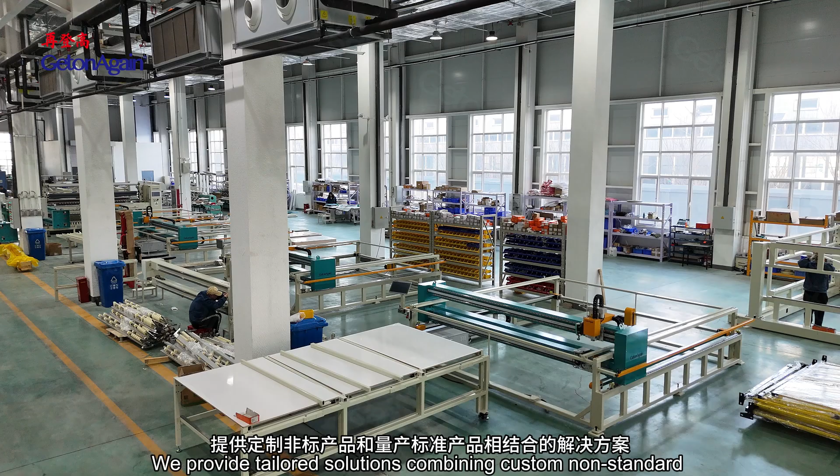We provide tailored solutions combining custom non-standard products with mass-produced standard products, including mechatronic machines, automated production lines, and intelligent factory solutions. Pattern room equipment includes the magnetic inkjet plotter, 2 cartridge with maximum printing speed at 110 square meters per hour.

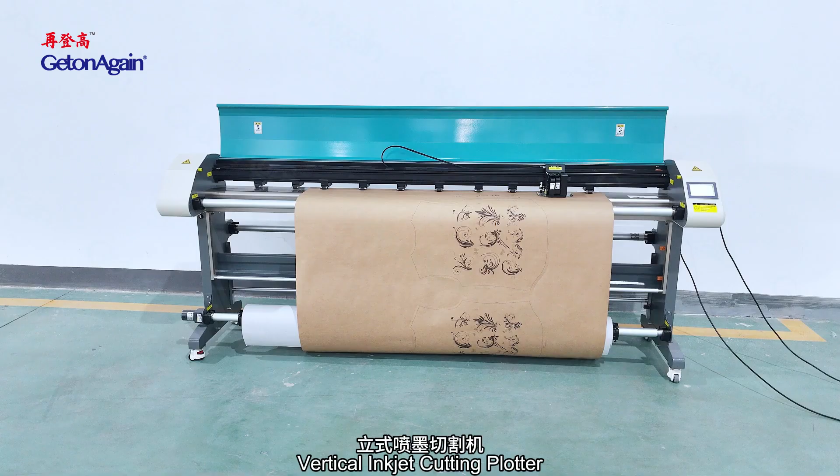4 cartridge with maximum printing speed at 200 square meters per hour. Vertical inkjet cutting plotter: 1 machine with multiple functions, pattern drawing with cutting, or standalone drawing. High-quality rotary cutting knife can cut a minimum of 80 grams per square meter paper for sample design, saving costs.

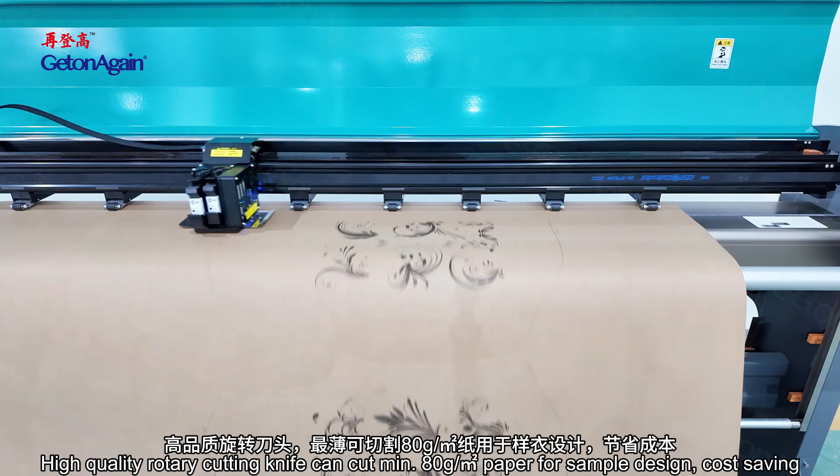Flatbed inkjet cutting plotter, full speed map printing and cutting function, suitable for personalization, configured with long knife or short knife, and optional fixed knife sleeve or elastic knife sleeve, suitable for cutting various materials.

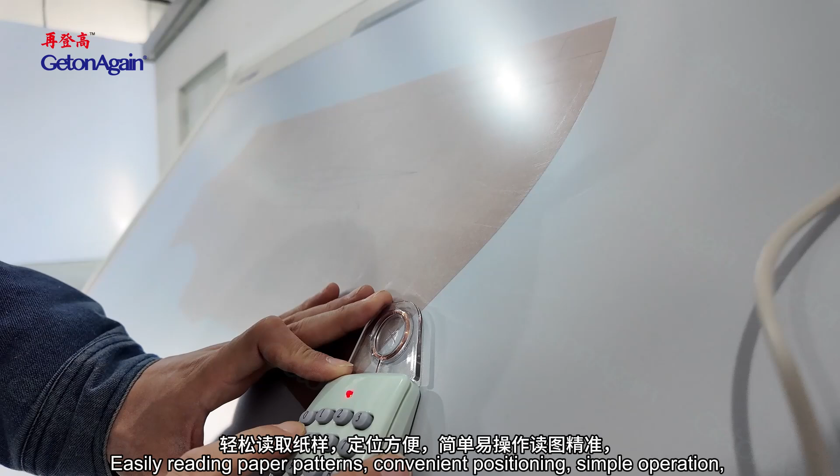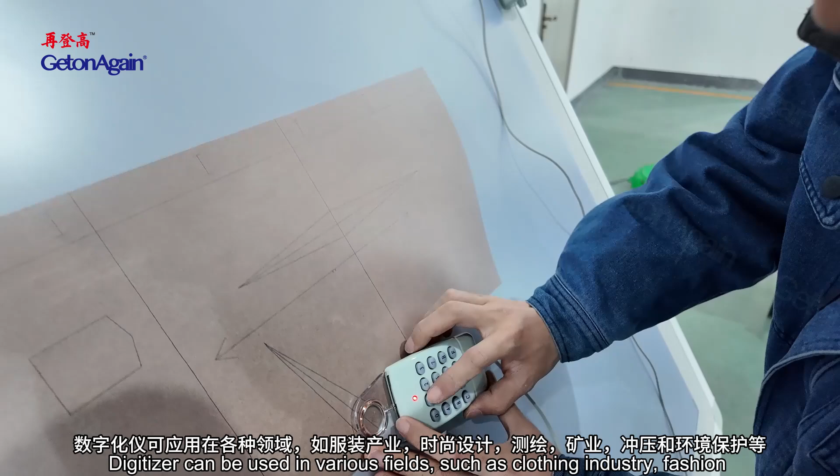Digitizer: easily reading paper patterns, convenient positioning, simple operation, accurately reading patterns, enabling speed up of the design. It is a powerful tool for traditional manual drawing digitization. Digitizer can be used in various fields, such as clothing industry, fashion design, surveying and mapping, mining, stamping and environmental protection, etc.

Flatbed scanning digitizer: 1 button to start after placing scanning pieces. Can vacuum absorption auto scan and auto transmit. According to different models, supports ultra long width scanning.

Scanning speed up to 7,200 mm per minute. Scanning resolution 150 to 300 dpi. High definition panoramic 1:1 image to ensure effective identification of various contours, notches, and inner holes.

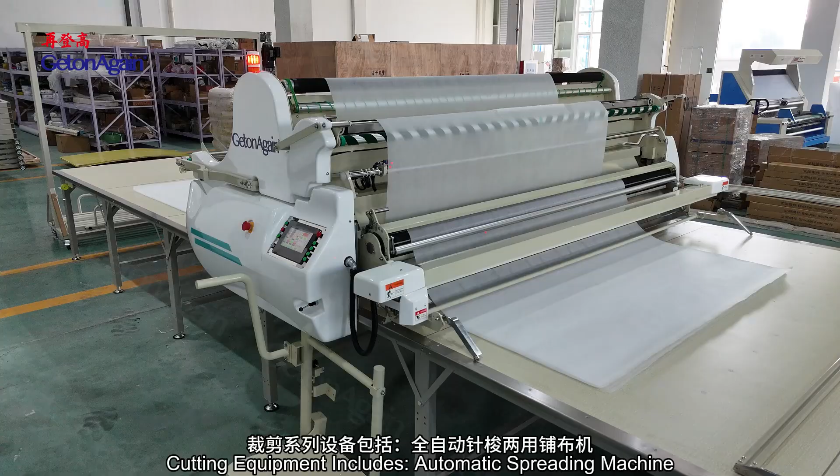Cutting equipment includes automatic spreading machine. Easily set the spreading method, length, speed, quantity and sections, with intuitive as well as simple operation. Dual use for both knit and woven fabrics, suitable for t-shirts, children's clothing, loungewear, and toy textiles.

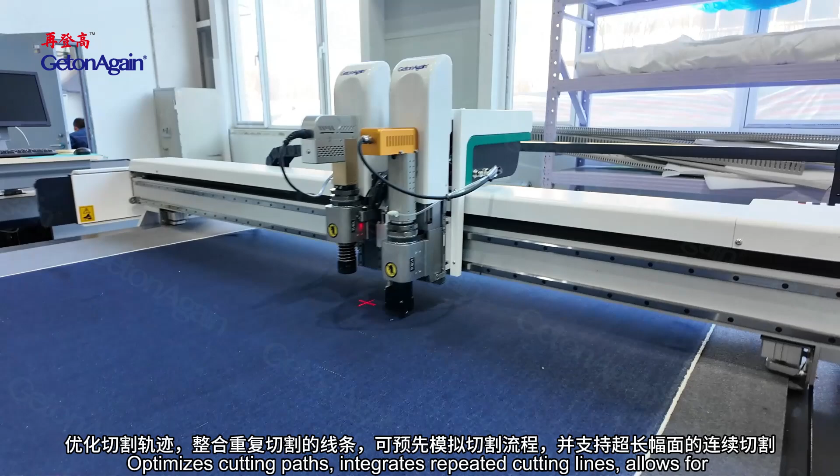Automatic single layer cutting machine. No need to create specialized cutting molds. Cutting can be performed precisely by directly importing CAD design drawings into the equipment. Optimizes cutting paths, integrates repeated cutting lines, allows for pre-simulation of the cutting process, and supports continuous cutting for extra long materials.

Stripe and plaid matching cutting machine, equipped with a few HD industrial cameras, performs intelligent combination according to the capture size, ensuring high accuracy fabric image capturing.

Stripe and plaid matching auto cutter, equipped with double knives and pen draw punching working mode, specially designed for various stripes and plaids fabric cutting in single ply.

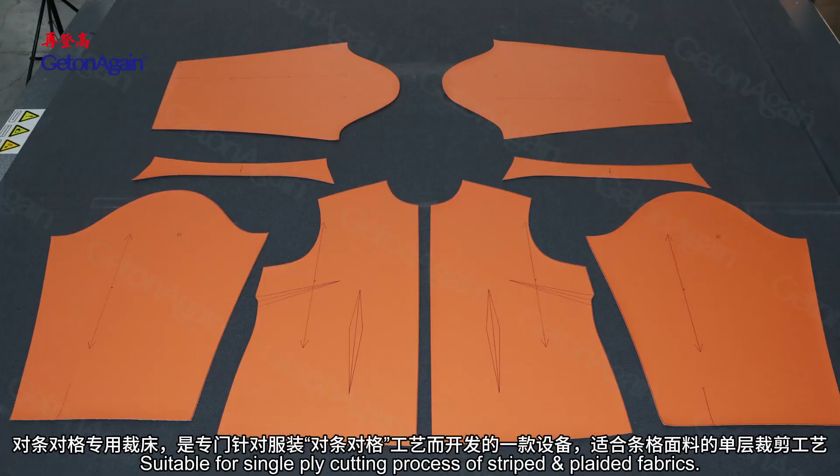High-end clothing customization: the effect of the alignment match stripe and plaid process has become an important measurement of the quality of this type of clothing. The stripe and plaid auto cutter is equipment specially developed for this process to meet matching stripe and plaid clothing needs, suitable for single ply cutting. Process of striped plaided fabrics.

Automatic multi-layer cutting machine. Through the combination of micron-level intelligent sensing components and an intelligent control system, dynamic compensation and correction of cutter deformation during cutting operations are achieved, significantly reducing errors between the top and bottom layers of fabric during cutting, enabling truly high-precision intelligent cutting.

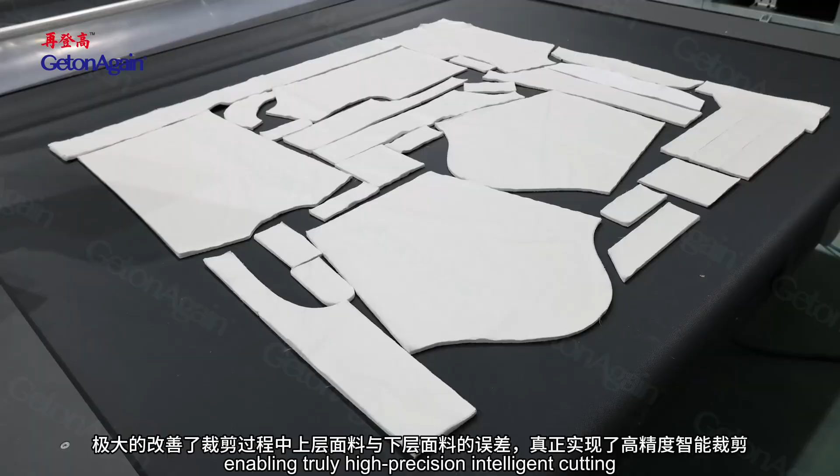Embroidery equipment includes the Cloud Smart Teaching Embroidery Machine, suitable for integrated theoretical and practical teaching of computer embroidery in fields such as fashion and apparel design, clothing design and engineering.

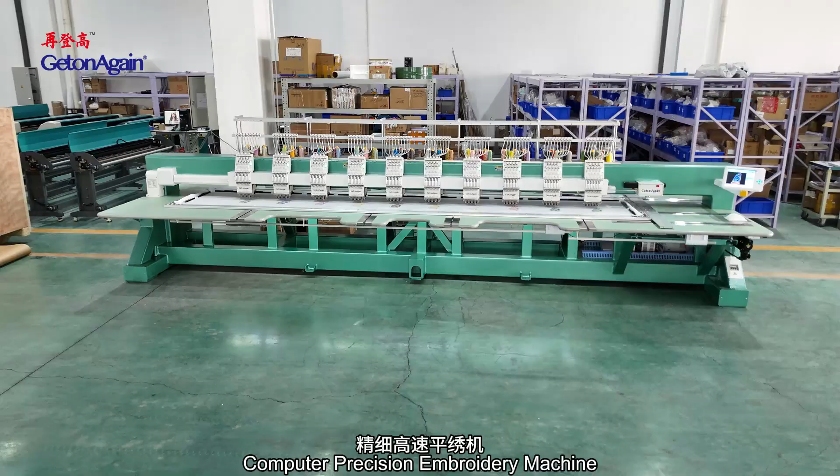Computer Precision Embroidery Machine features a high-speed sewing head with extremely low failure rates, long service life, low noise, and stable, reliable quality, suitable for embroidering small letters, premium garments, high-end home textiles, footwear, hats, automotive products with embroidery, etc.

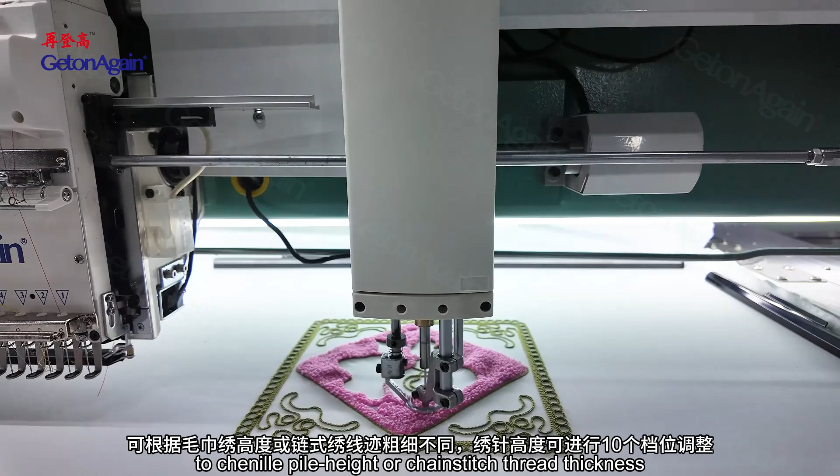Mixed chenille chain stitch embroidery machine. Mixed embroidery feature, according to color sequence settings, switchable between chenille embroidery and flat embroidery, simplified operation. Chenille needle height can be adjusted for 10 levels according to chenille pile height or chain stitch thread thickness.

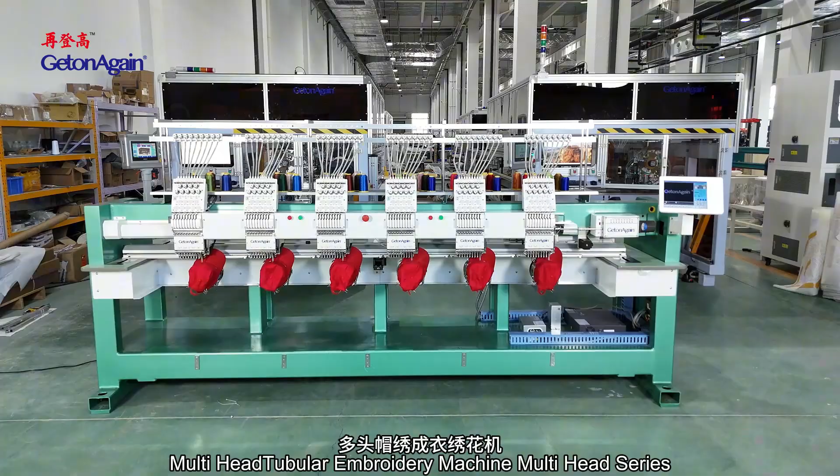Multifunctional embroidery on garment, shoes, caps, home textile, toys, bags and luggage, art craft, etc. Multi-head tubular embroidery machine multi-head series, suitable for embroidering on flat, caps, garments, shoes, belts, bags, etc.

Auto thread feeders, auto color change, auto thread break detection, 270 degree wide angle cap system, red light locating, LED lighting, precise head and drive system to ensure exquisite embroidery work.

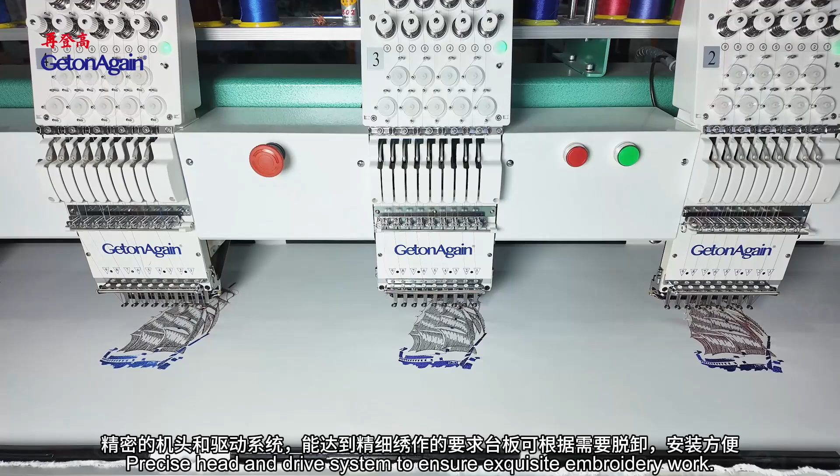Drop tables, easy to lift up and down. Multiple heads greatly improve work efficiency, suitable for embroidery shops and factories of a certain scale.

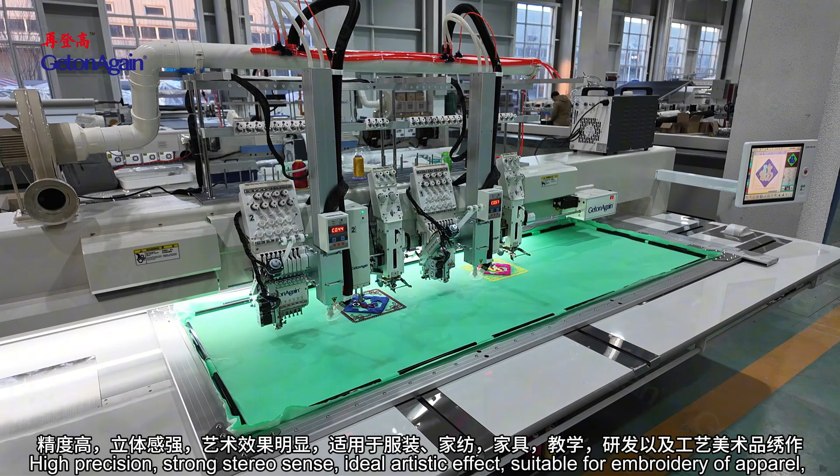Computerized 5-in-1 embroidery machine, integrated 5 functions in one machine: flat embroidery, coiling, tape cording embroidery, chenille, chain stitch embroidery, double sequin device, laser cutting function, high precision, strong stereo sense, ideal artistic effect, suitable for embroidery of apparel, home textile, furniture, teaching, design and arts and crafts, etc.

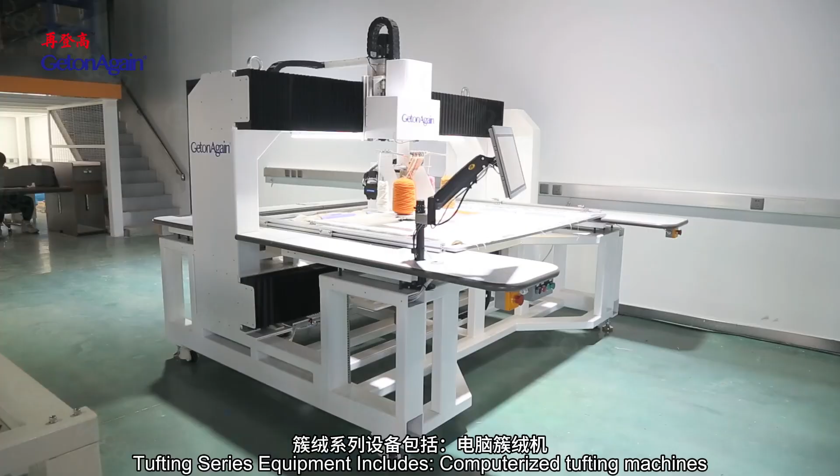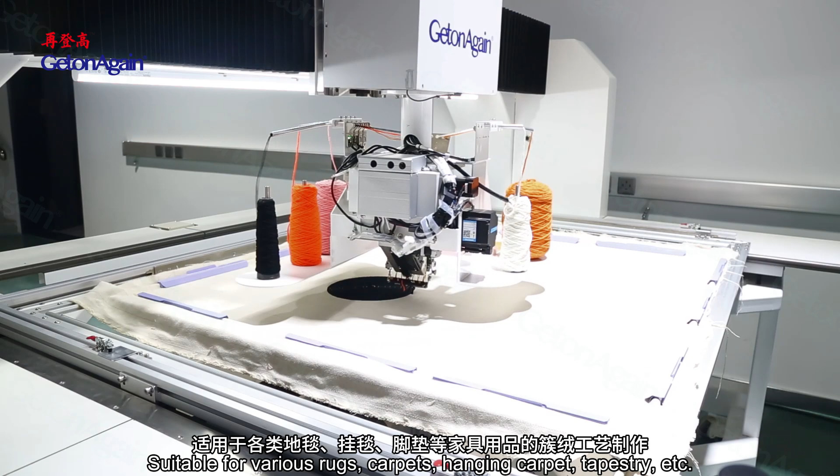Tufting series equipment includes computerized tufting machines, rotary tufting head in any angle, avoid positive-negative stitching difference, higher efficiency, better tufting result, suitable for various rugs, carpets, hanging carpet, tapestry, etc. Those flooring decorative and home furnishing products tufting.

Laser equipment includes small format camera positioning laser engraver cutting machine, supports array recognition processing, with options for full sheet recognition, followed by cutting or simultaneous recognition and cutting. Features multi-template mixed cutting, allowing the recognition and positioning of different patterns to be completed in a single operation.

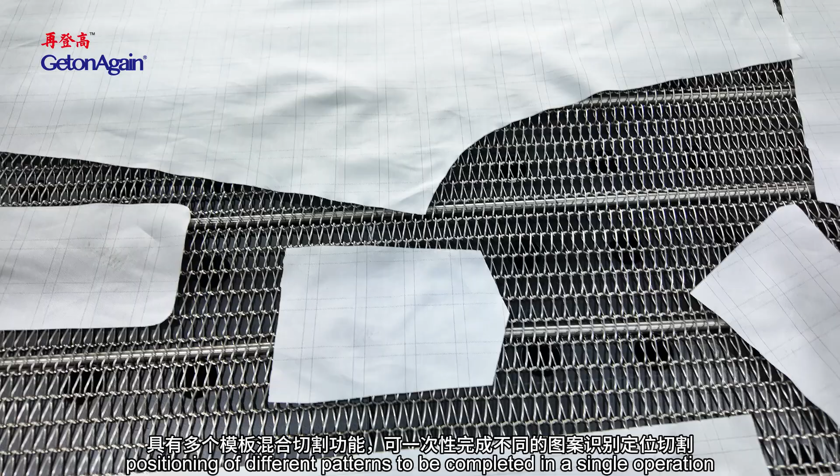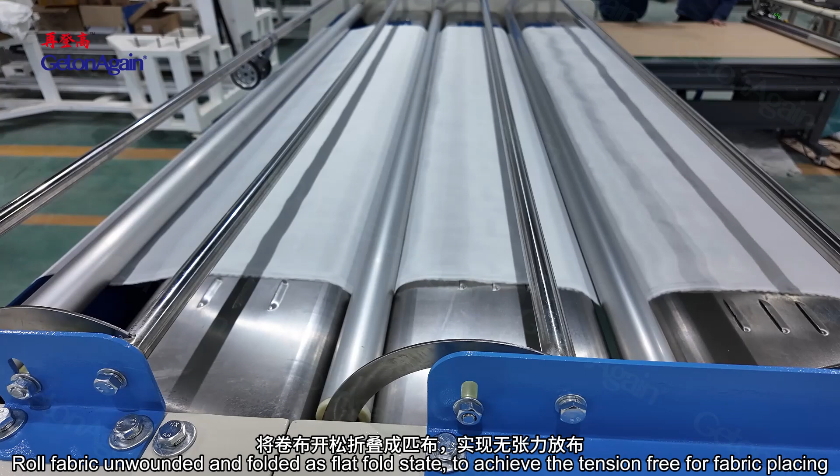Pre-sewing auxiliary equipment includes automatic edge alignment, relaxing machine, air blowing, roll fabric unwounded and folded as flat fold state to achieve the tension-free for fabric placing. Wave-type air blowing device, in loosening fabric process, fabric is relaxed by the blowing device.

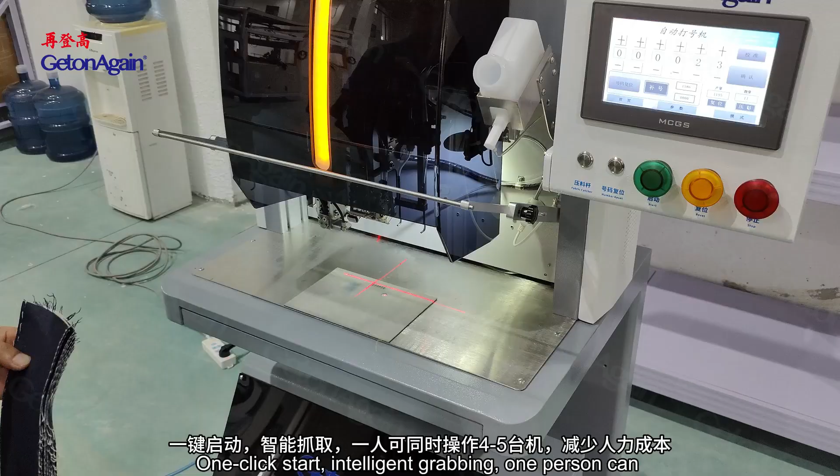Automatic marking machine, one-click start, intelligent grabbing, one person can operate 4 to 5 at the same time, reducing labor costs. Automatic number adjustment, automatic counting, wrinkleless after flipping, continuous numbering, accurate and clear position. The cutting piece for jeans, shirts, workwear and down, etc.

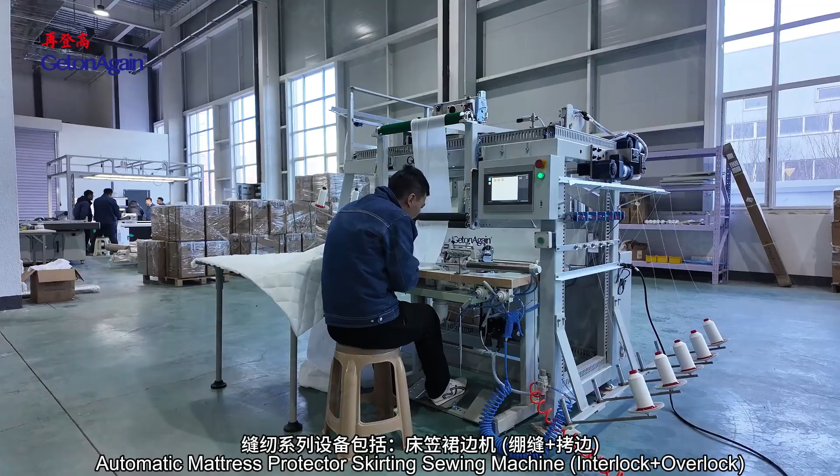Fully automatic winding machines. Sewing equipment includes automatic mattress protector skirting sewing machine, interlock and overlock, suitable for processing fitted sheets, all in one to finish binding stitching of elastic rope cord and bed skirt, and the overlocking of bed skirt to mattress protector topper layer.

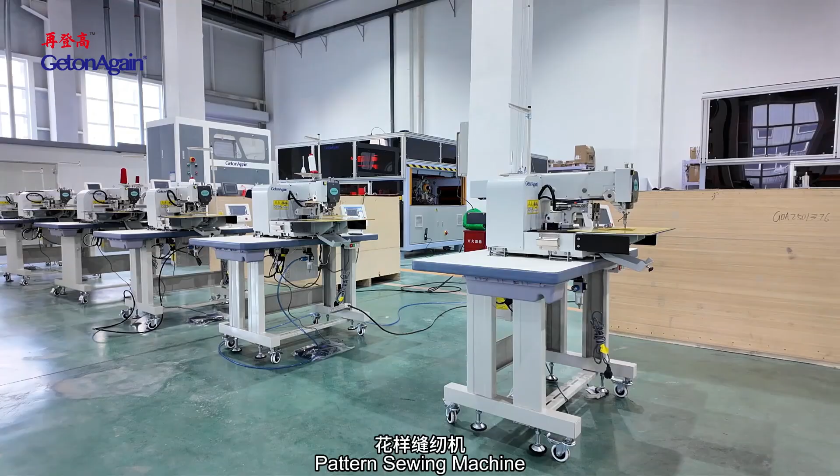Pattern sewing machine. This machine can easily sew 1,200 thick thread with a thickness of 12 mm, 2 times large rotary hook, automatic thread trimming, and the maximum sewing speed can reach 2,500 RPM.

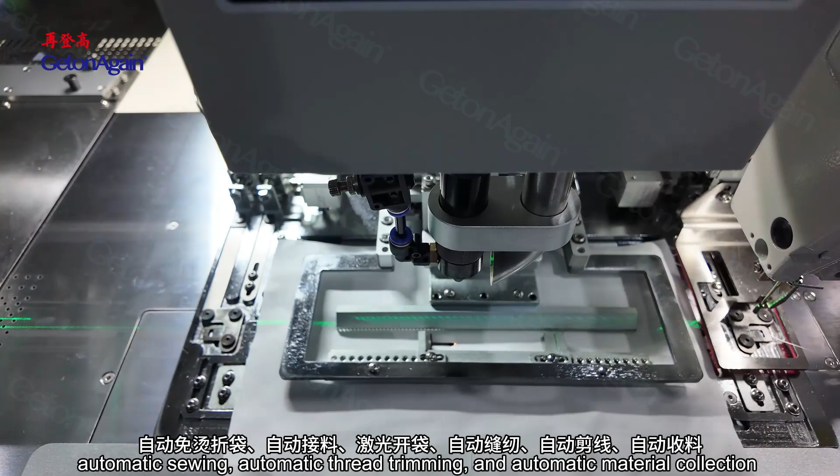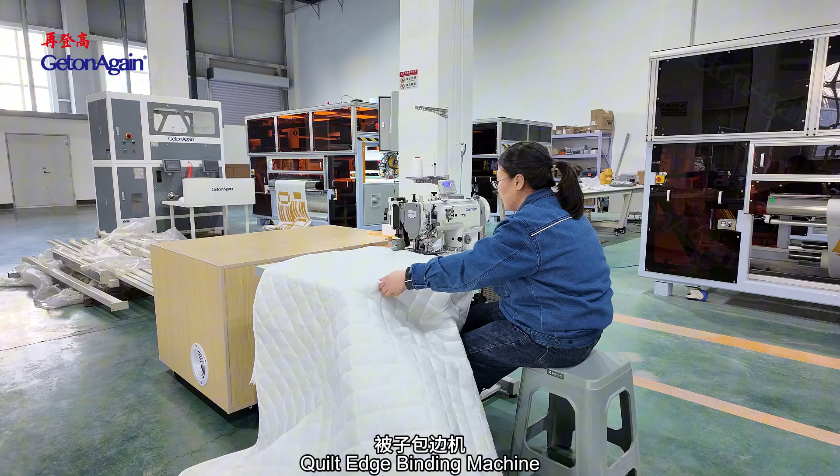Automatic laser pocket opening machine, automatic ironing-free pocket folding, automatic material feeding, laser pocket opening, automatic sewing, automatic thread trimming, and automatic material collection. Front and back pockets for men's and women's clothing, suits, inner and outer pockets of jackets, dress pants, hoodies, sun protection clothing, school uniforms, sportswear, cotton padded jackets, down jackets, workwear, jackets, uniforms, trench coats, cashmere coats, and plackets for polo shirts.

Quilt edge binding machine, features of single needle compound feed, achieving cutting, binding, and sewing in one seamless operation. Enlarged right side waste discharge port with pneumatic waste discharge assistance ensures smoother disposal of waste generated during edge cutting. Special synchronized feeding structure, including alternating presser foot, needle, feed dog, and binding attachment, ensures no wrinkles or misalignment during straight line or corner sewing for a flawless binding effect.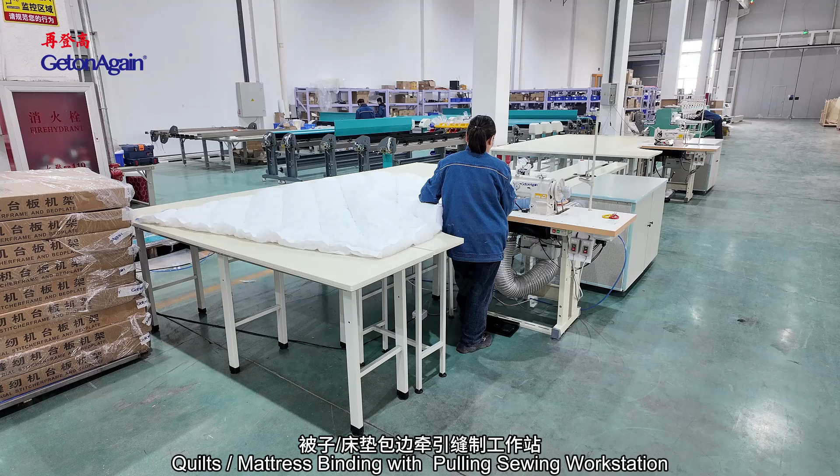Designed for edge binding processes of quilts such as cotton quilts, summer quilts, spring and autumn quilts, and other bedding items. Quilts, mattress binding with pulling sewing workstation. Equipment factory standard provides air floating table and automatic pulling device, making sewing worker operation easier and smoother. Equipped with PLC control pulling device and synchronized with sewing machine electronic control. These two machines are working in the same speed and synchronize the direction.

Optional automatic storage and vacuuming device to improve efficiency, reduce dust emissions, and provide the sewing operator a clean and tidy working environment. Binding result is rich and strong solid feel. Corners are smooth and nice, evenly stitched lengths, no hairy edge, no edge folding, neither corner raising effect, those negative symptoms, etc.

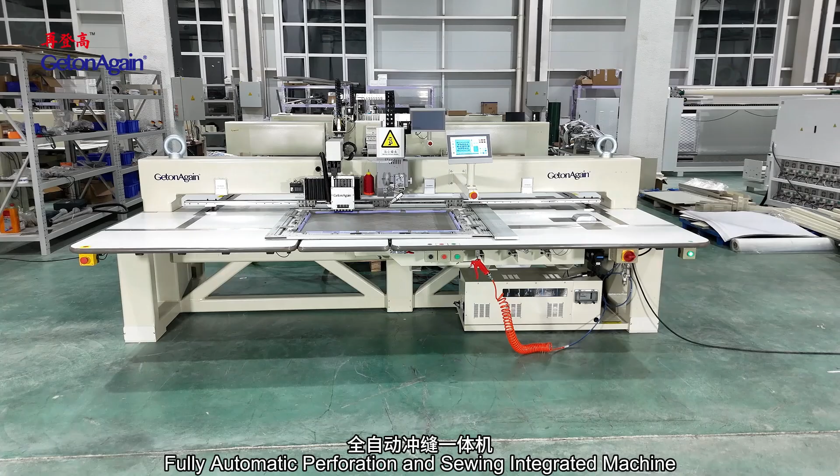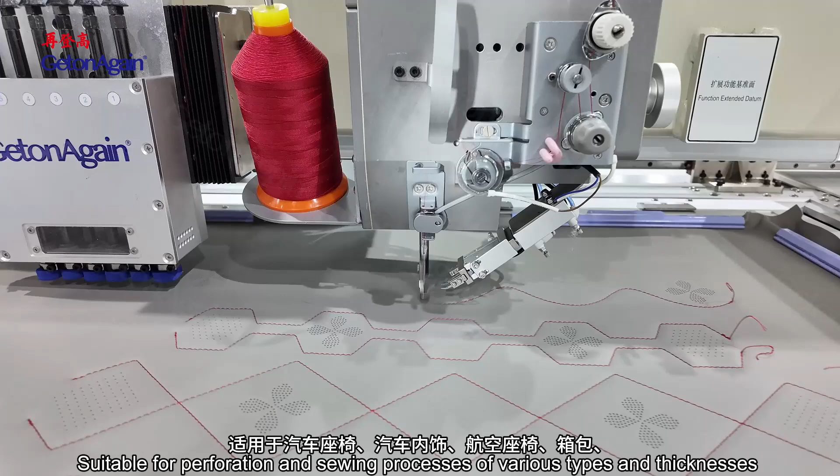Fully automatic perforation and sewing integrated machine. Punching machine head is specifically designed and developed for leather materials, equipped with various round punching tools specifications. Sewing head up moving stroke in 50 mm, providing sufficient space for material loading and easy operation. Suitable for perforation and sewing processes of various types and thicknesses of genuine leather and microfiber leather used in car seats, automotive interiors, aircraft seats, luggage, furniture, and more.

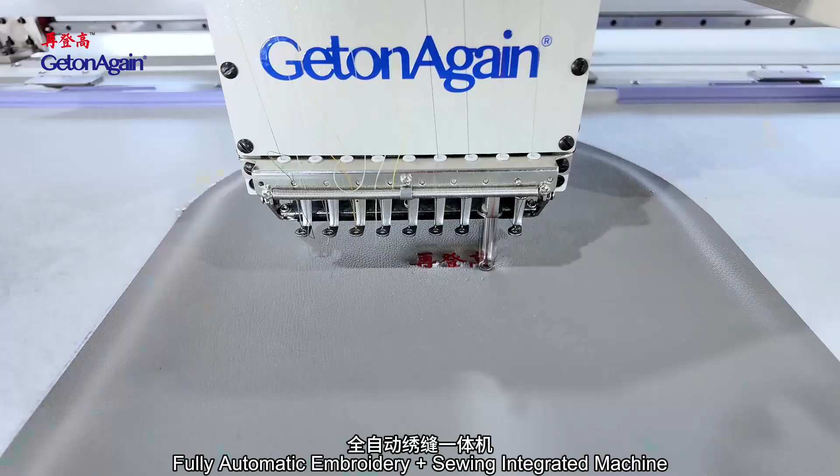Fully automatic embroidery and sewing integrated machine. 9-color embroidery machine head to meet the embroidery needs of different industries. The embroidery thread clamping mechanism incorporates a novel upper thread clamping assembly, effectively reducing thread breakage and slippage occurrences during operation. Specially designed sewing machine head for leather materials, producing beautiful stitching.

Presser foot height is motor controlled and highly adjustable. Sewing machine head has up-down moving stroke of 50 mm, providing ample space for material loading and ease of operation. Suitable for various types and thicknesses of genuine leather and microfiber leather for automotive seats, car interiors, aviation seats, luggage, furniture, etc., combining embroidery and sewing processes.

Multi-hole bar tacking machine. Press arm and sewing frame work synchronously. Ensure high precision bar tacking. Suitable for chair head, cushion and pillow, all those with fillings, and bar tacking requirement for reinforcing sewing work.

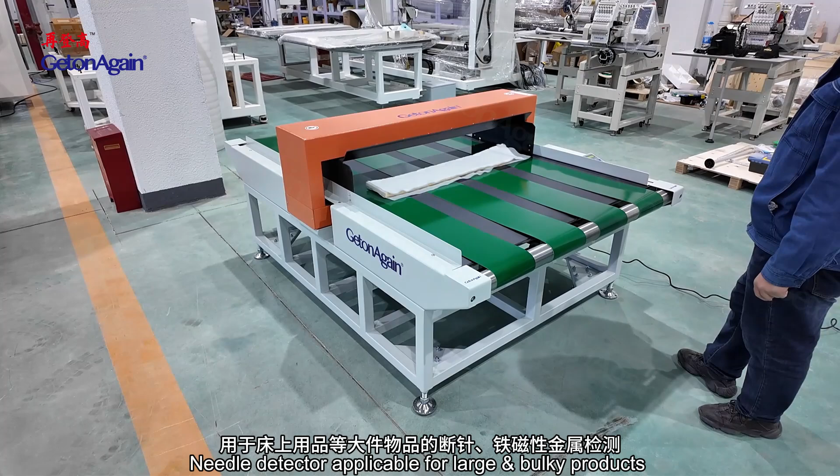Industrial sewing machines include various overlock and lock stitch machines. Post-finishing equipment includes needle detector. Needle detector applicable for large bulky products with ferromagnetic metal detection, for example bedding, etc. Working width can be adjusted between 1,200 to 4,000 mm according to customer setting.

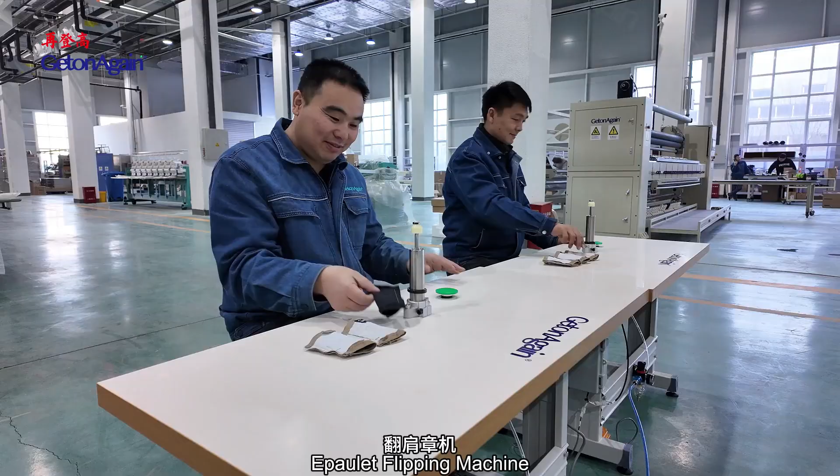Epaulet flipping machine replaces manual operation with high efficiency, safety and reliability, suitable for the flipping and turning process of epaulets or strap of various sizes and other products.

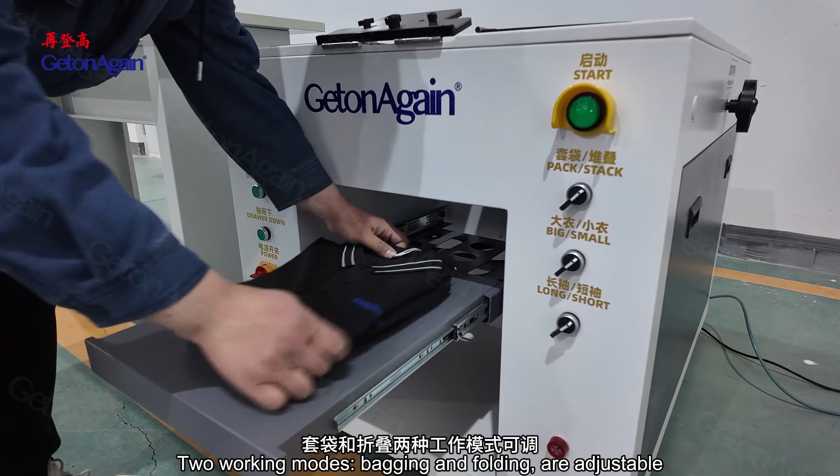Automatic folding and packaging machine: economical, small floor space, simple operation, standard folding effects, automatic transferring to next station in stacking mode. Two working modes, bagging and folding, are adjustable. Both folding width and length are adjustable within a certain range. T-shirt, polo shirt, hoodie, thermal wear, pants and lightweight jacket, etc.

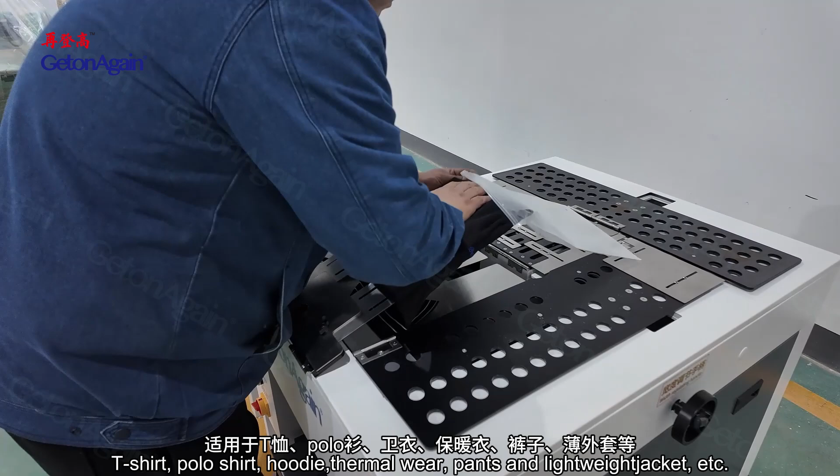Single, dual heads cap pressing machine for baseball caps. Steam time, cap clamping time, steam output, and air consumption can all be automatically adjusted. Built-in steam generator eliminates the need for an external boiler with automatic water supply, suitable for bulk order production needs. Using robotic arm, can automatically grip the cap. Simply place the cap on the mold to complete the pressing process.

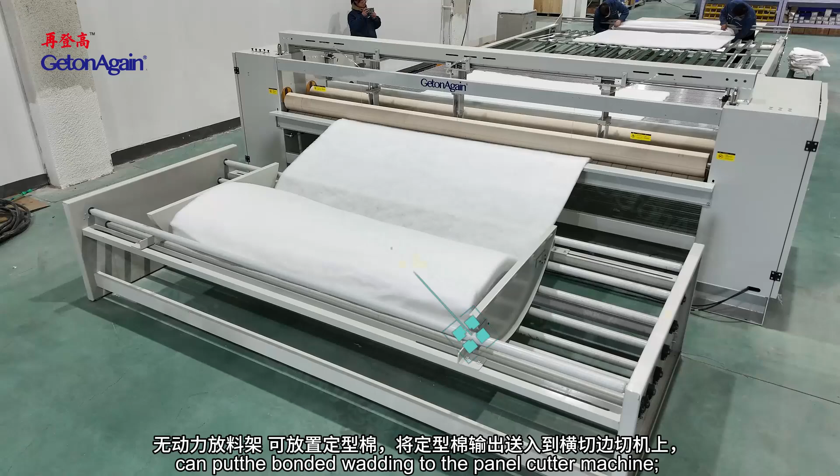Roll fiber panel cutting case filling line: edge trimming, lengths counting, cutting for polyfiber, thermal bonded wadding, chemical bonded wadding. Machine feature: unpowered material loader, can put the bonded wadding to the panel cutter machine. Equipped bearings on each roller, labor saving and energy saving. Electric flyover automatic cross cutting.

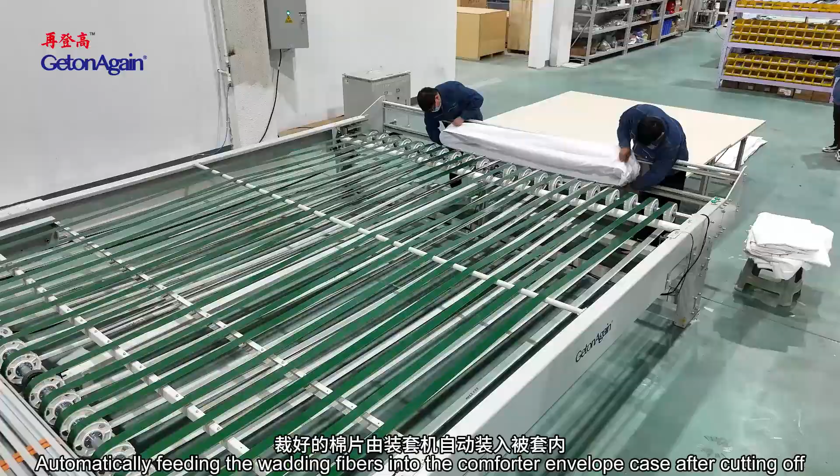Two sets of longitudinal cutting blades can be increased or decreased according to product requirement. Automatically feeding the wadding fibers into the comforter envelope case after cutting off. Length set is controlled by computer and could set any value according to requirement.

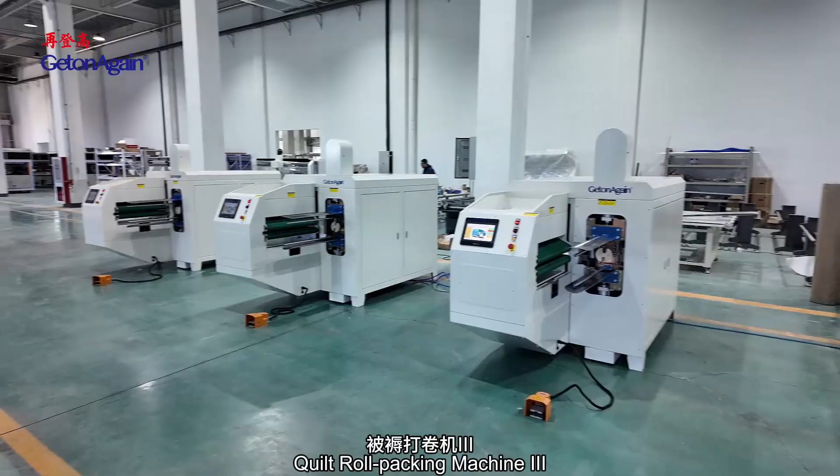Quilt roll packing machine, suitable for rolling and packing of fluffy items such as quilts, pillow, cushion, etc., to reduce the volume and storage, as well as lower transportation cost. Packing item is auto-fed from backward to forward by the belt during the compressing process and rolled to pack into the bag.

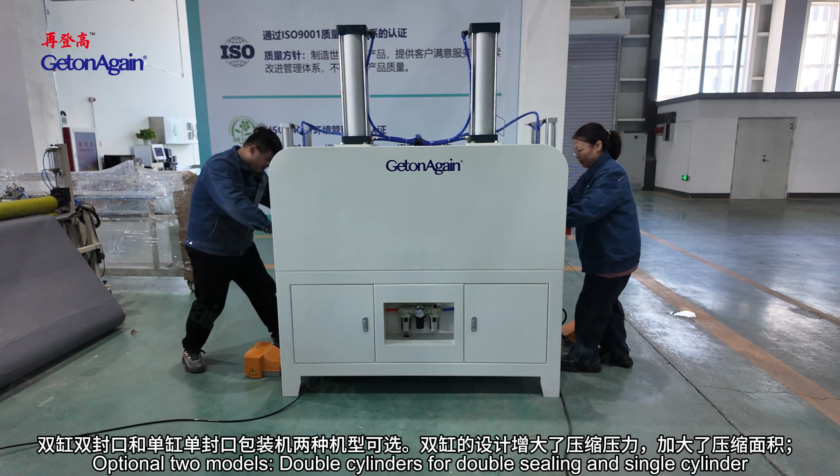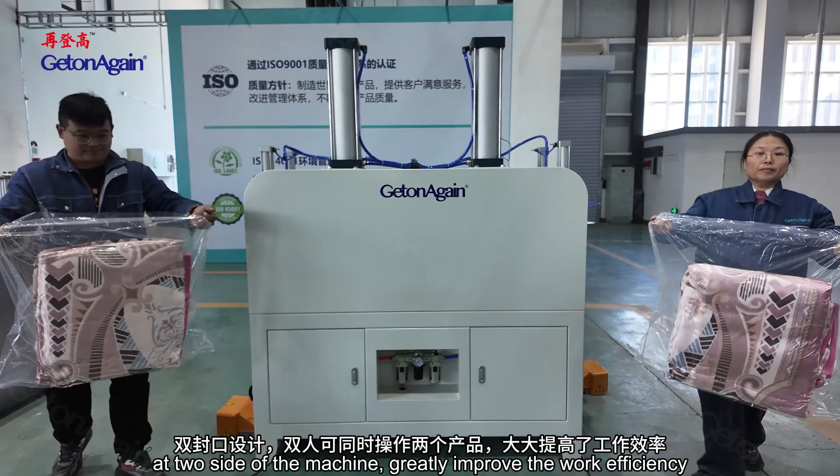Double cylinders, double operation, optional models. Double cylinders for double sealing and single cylinder for single sealing. The double cylinder design increases the compression pressure and area. Double seal design, two workers operate two products at the side of the machine, greatly improving the work efficiency, suitable for compressed packing of pillows, cushions, bedding, plush toys and other products.

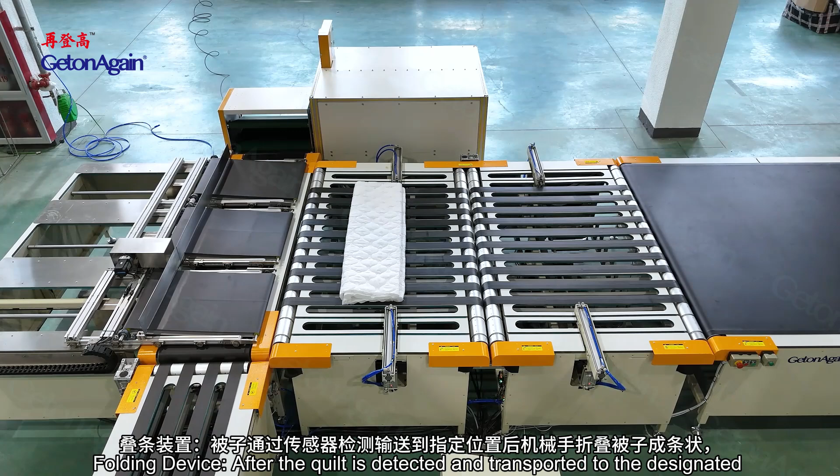Automatic folding and packaging machine, equipment mainly composed of folding device, rolling device, stacking and compress plus conveyor device. Folding device: after the quilt is detected and transported to the designated position by sensors, a robotic arm folds the quilt into a strip shape. After being detected by sensors, the strip-shaped quilt is transported to the designated position and folded into a block shape by a robotic arm. Rolling device: the strip-shaped quilt is transported to the automatic rolling device to complete the rolling process.

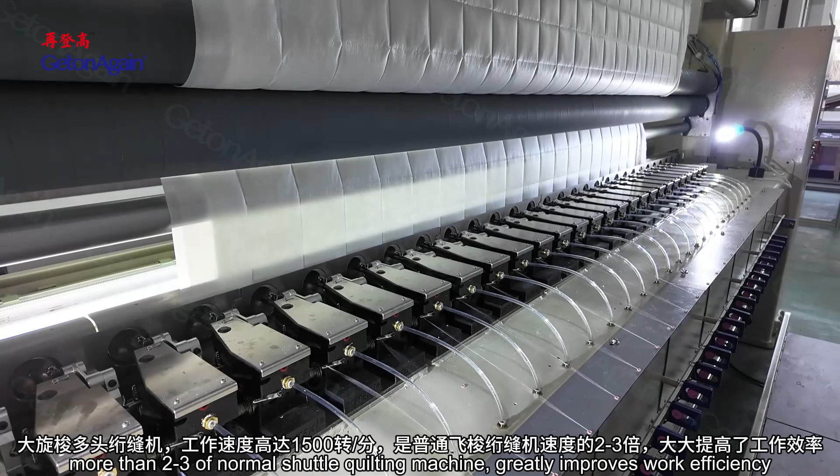Quilting equipment includes computerized multi-head rotary hook quilting machine model N, double row lock stitch multi-head quilter with large rotary hook. Max speed of 1,500 RPM, 2 to 3 times more than normal shuttle quilting machine. Greatly improves work efficiency. 3-fold capacity rotary hook, less bobbin changing frequency. Beautiful stitches, no lost stitch, no thread loose.

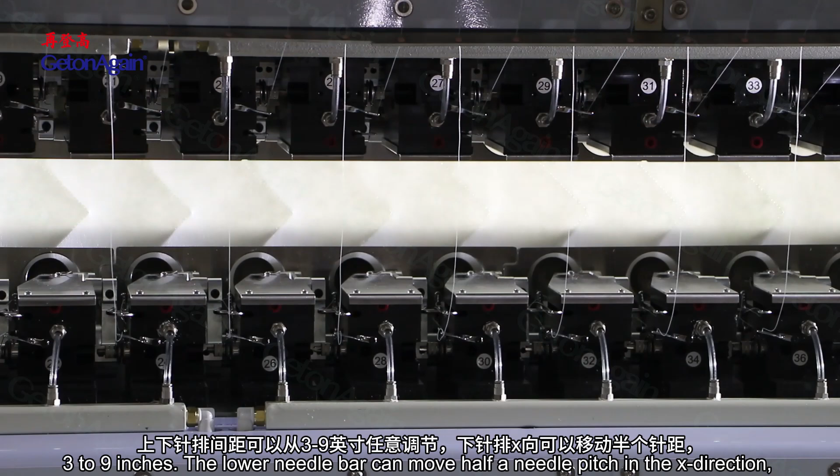Computerized multi-head rotary hook quilting machine model E, 5-time jumbo rotary hook, less bobbin changing frequency, beautiful stitches, no lost stitch, no thread loose. The interval between the upper and lower needle bars can be adjusted to any value from 3 to 9 inches. The lower needle bar can move half a needle pitch in the X direction, so that quilting needle bars of different sizes and patterns can be combined, especially for some non-standard size patterns, which can achieve a unique effect.

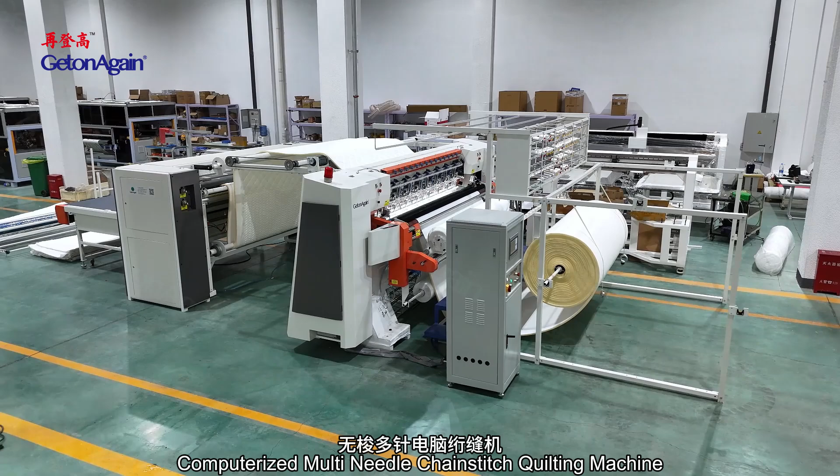Computerized multi-needle shuttle quilting machine, flying shuttle, for quilting of fitted sheet, bed covers, summer quilts and clothing products with quilting pattern. Computerized multi-needle chain stitch quilting machine. Servo motor-driven rollers and lead screws ensure precise quilting patterns, suitable for mattresses, mattress covers, sofas, bedding, home textiles and home decor.

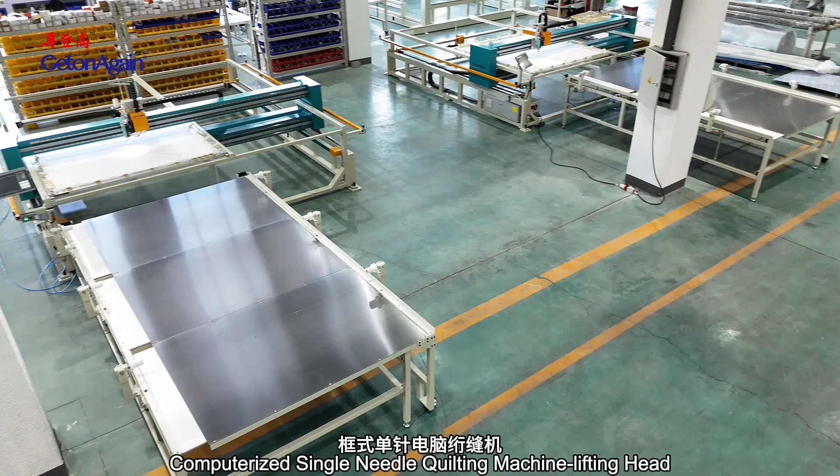Computerized single-needle quilting machine, lifting head. The extendable quilting frame can be freely adjusted according to required size. Quilting head with independent presser foot drive, suitable for various materials with different thickness. Full servo motor control, providing powerful and accurate driving force.

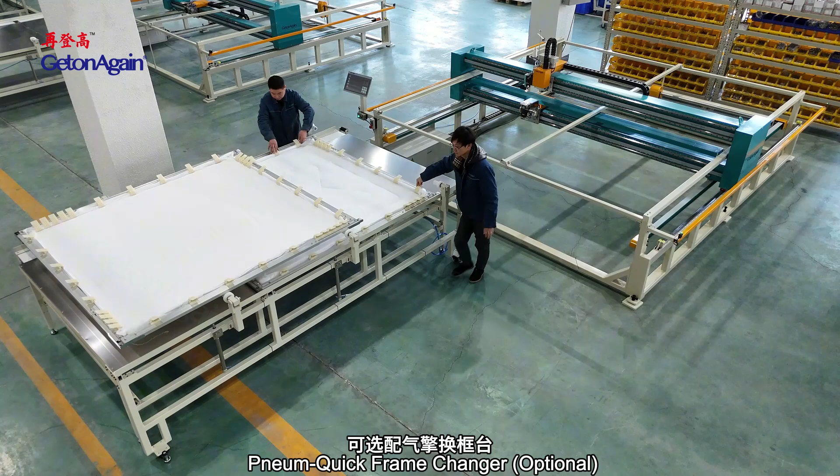Automatic lifting head, easily change the frame after finishing quilting. Quick frame changer optional. Quilting process for home textile products such as quilts, comforters, mattress protector, blanket, sleeping bag, single needle art quilts, etc.

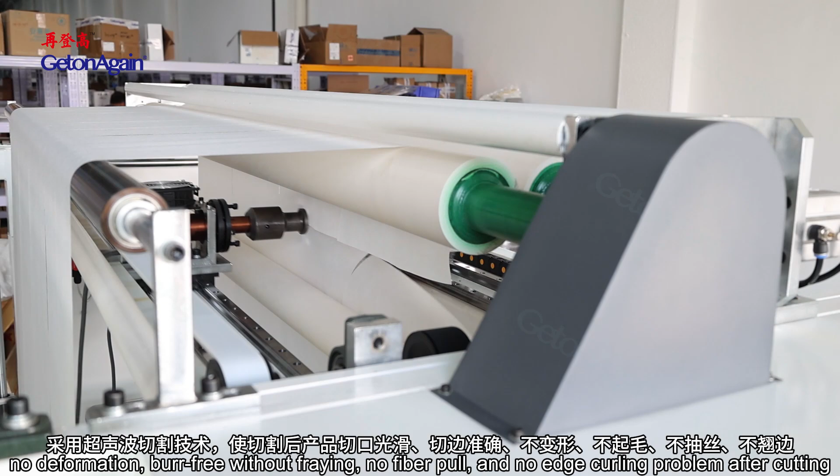Ultrasonic equipment includes ultrasonic slitting machine, adopted ultrasonic cutting technology, ensures smooth cutting edges, precision edge cutting, no deformation, fray-free, no fiber pull, and no edge curling problem after cutting. Cutting rollers and patterns can be customized to meet various needs.

Automatic ultrasonic quilting machine, integrating ultrasonic sewing and ultrasonic edge sealing and cutting automation into one, completing the process in a single step. The latest structure design with interleaved transducers ensures embossing seamless non-wrinkles. After quilting, it can be connected with cutting machine to the finished product, or connected with rewinding device to the

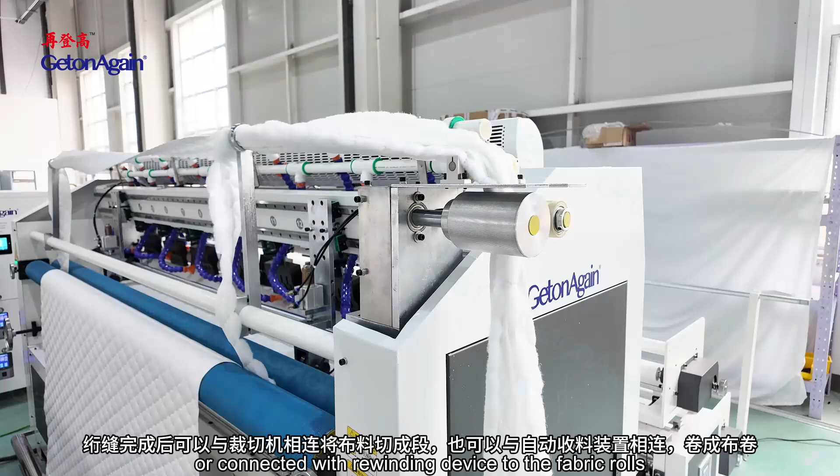fabric rolls. Ultrasonic quilting machine, to bond multi-layer of polyester fabric, non-woven fabric, polyester wadding, or artificial leather, etc., and emboss different patterns on it. Patterns are clear and beautiful, and fabric doesn't deform, with strong bonding and high efficiency.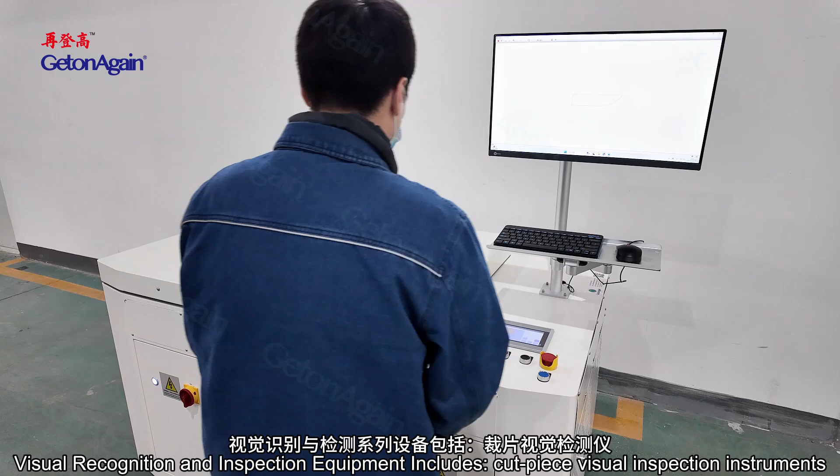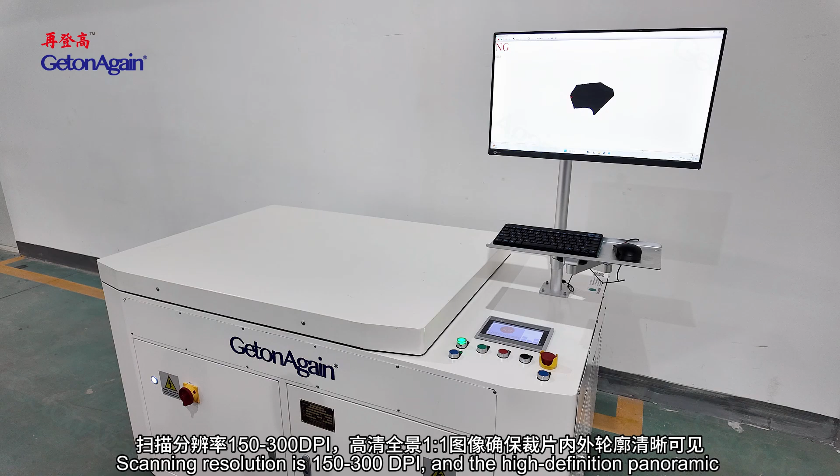Visual recognition and inspection equipment includes cut piece visual inspection instruments. After manual placement, one-click start allows for automatic scanning, automatic inspection of cut pieces, and automatic data storage. Scanning speed can reach up to 120 millimeters per second, with no need for additional lighting, ensuring reliable use in all weather conditions. Scanning resolution is 150 to 300 dpi, and the high-definition panoramic 1:1 image ensures that the inner-outer contours of the cut pieces are clearly visible.

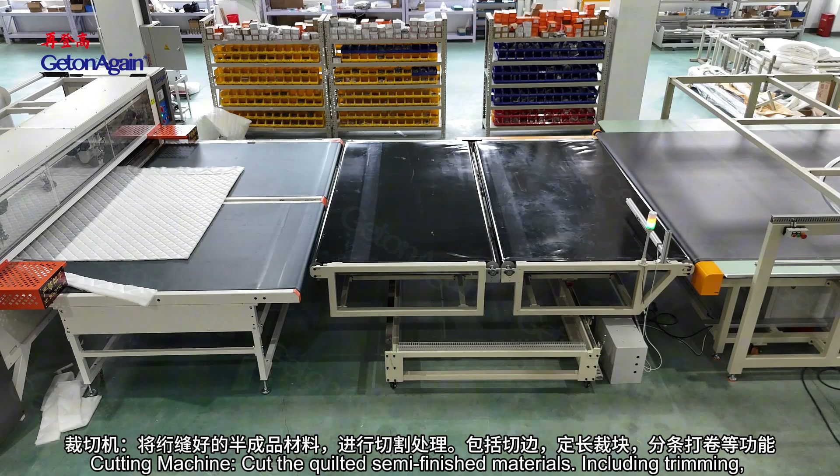Automated production line series includes multi-needle quilting machine flying shuttle and cutting machine and 4-side tape binding machine production line. Multi-needle quilting machine. The raw materials are quilted and fixed lock stitches, mainly used to process quilt cores and cushions. Cutting machine. Cut the quilted semi-finished materials, including trimming, fixed length cutting, slitting and rolling and other functions.

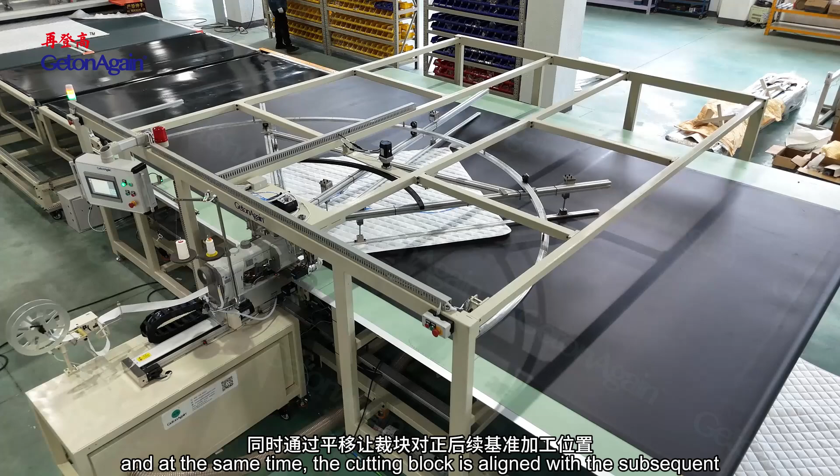Alignment platform. Material transfer alignment mechanism. The cutting block waits to enter the next sequence on this platform, and at the same time, the cutting block is aligned with the subsequent reference processing position by translation. Automatic tape binding machine. The cutting piece is processed by the tape binding machine to make the edge of the cut piece beautiful. The machine rounded corner tape binding process. The cutting and tape binding are integrated, and all actions are completed automatically.

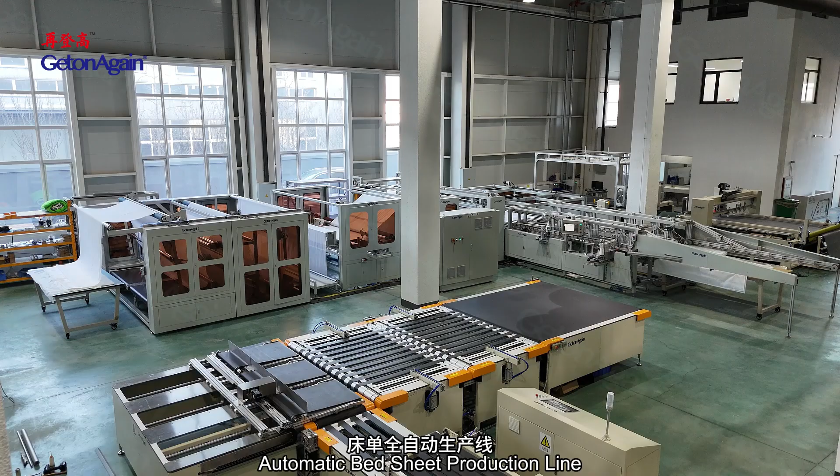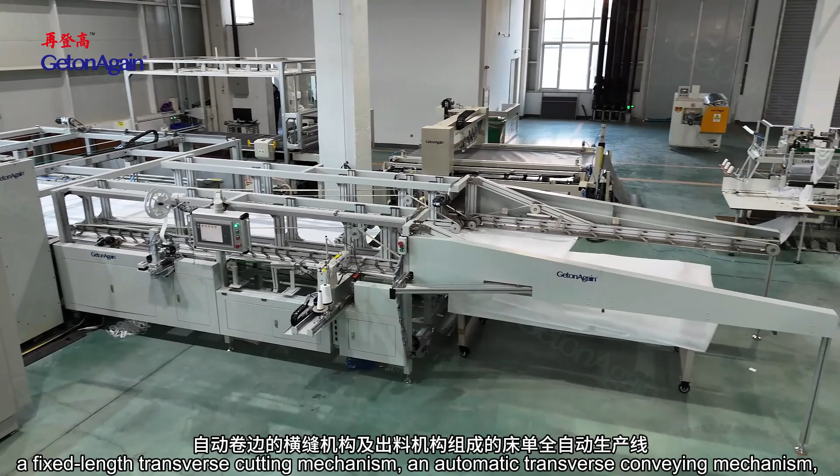Automatic bed sheet production line. A fully automated bed sheet production line composed of a feeding mechanism, an adjustable width longitudinal sewing mechanism, a fixed length transverse cutting mechanism, an automatic transverse conveying mechanism, an automatic hemming transverse seam mechanism, and a discharging mechanism.

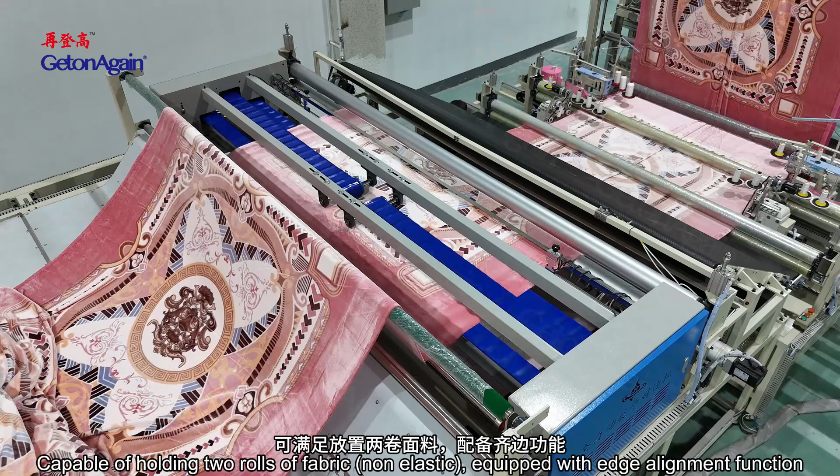Automatic blanket straight corner binding machine, capable of holding 2 rolls of fabric non-elastic, equipped with edge alignment function, automatically pull and cut into panels. Pulling lengths can be set freely. 4-side tape binding sewing process for inelastic blankets. Home textile comb cotton production line.

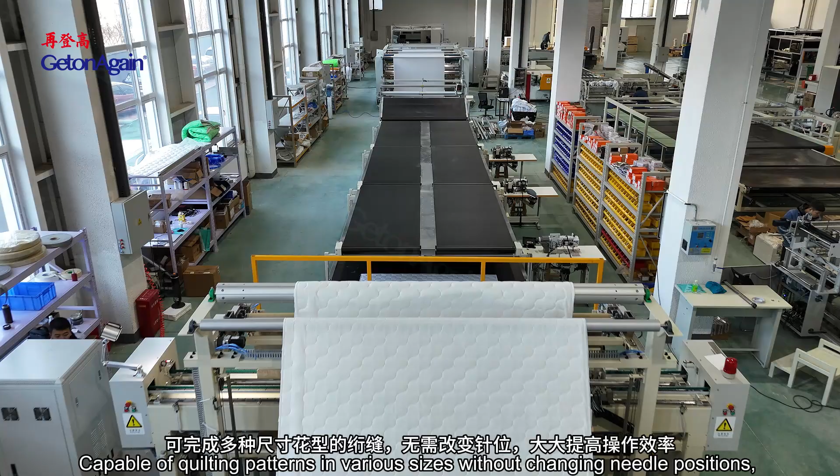Computerized multi-head rotary hook quilting machine and 4-side edge sewing machine, capable of quilting patterns in various sizes without changing needle positions, greatly enhancing operational efficiency. Double row machine with lower needles row can move half of the head distance in X direction, creating combination patterns of different sizes when coordinated with the upper needles.

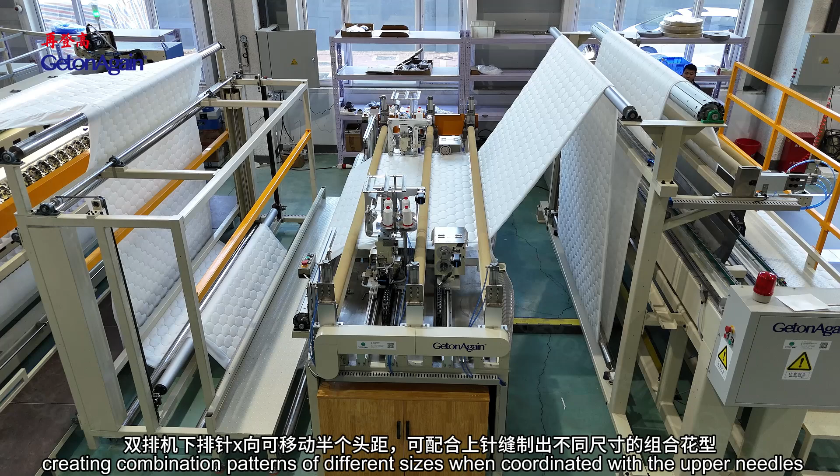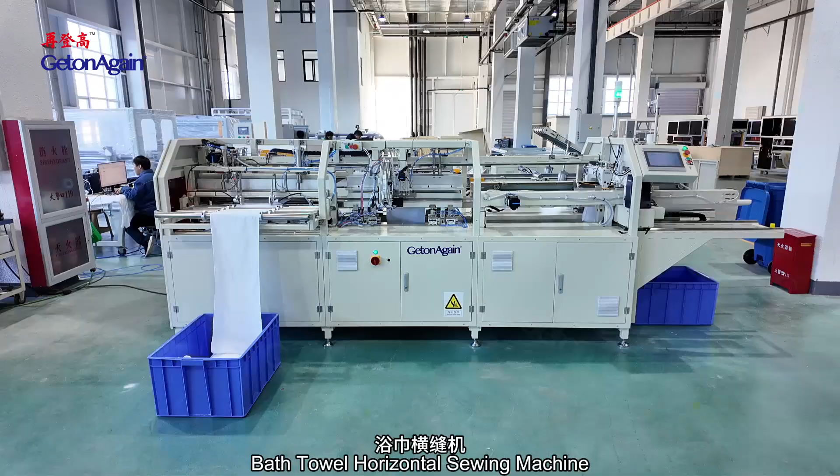Longitudinal sewing, double chain stitch optional lock stitch or overlock stitch, transversal sewing, multi-needle chain stitch sewing, transversal cutting between the 4 stitches, cutting as per set length and feeding to next sequence. Bath towel horizontal sewing machine, folding and sewing process for inelastic towels.

Garment CAD includes garment CAD, super nesting, template CAD, intelligent tufting CAD, wire stitching CAD, perforation and embroidery CAD. In addition, GetonAgain has developed a digital operation and management system for industries such as garment processing and machinery manufacturing. This system helps customers improve production efficiency and management levels. It is a specialized multi-directional, full process, and full chain digital solution.

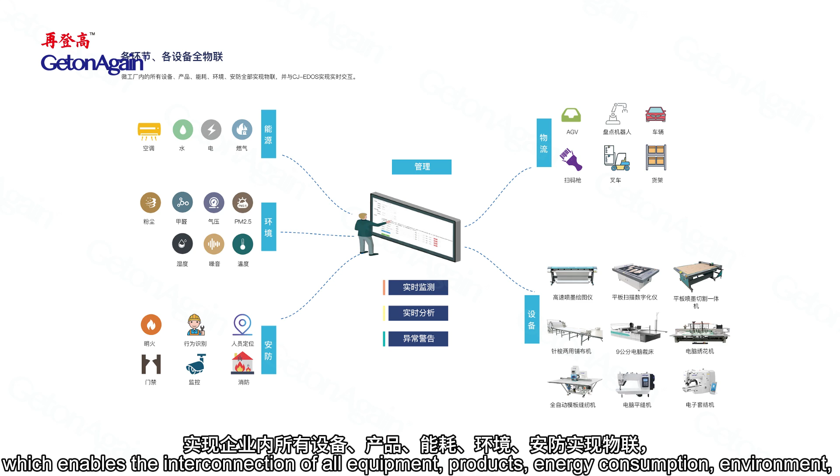Its features can be summarized as the four ones: one industrial enterprise, one technology platform, one data standard, and one operating system. It is the optimal choice for enterprises to achieve digital transformation and intelligent upgrading. Furthermore, by integrating Internet and IoT technologies, the company has developed an enterprise operating condition IoT management system, which enables the interconnection of all equipment, products, energy consumption, environment, and security within the enterprise.

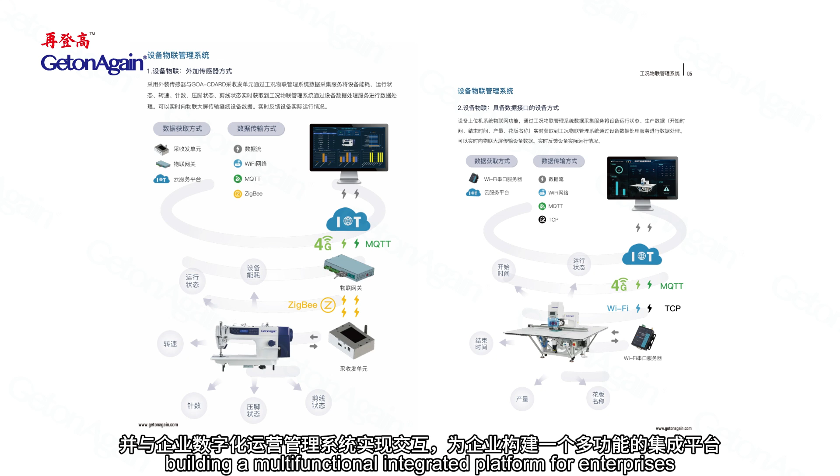This system interacts seamlessly with the enterprise digital operation and management system, building a multifunctional integrated platform for enterprises. It enables functions such as data collection, real-time monitoring, data analysis, and remote management.